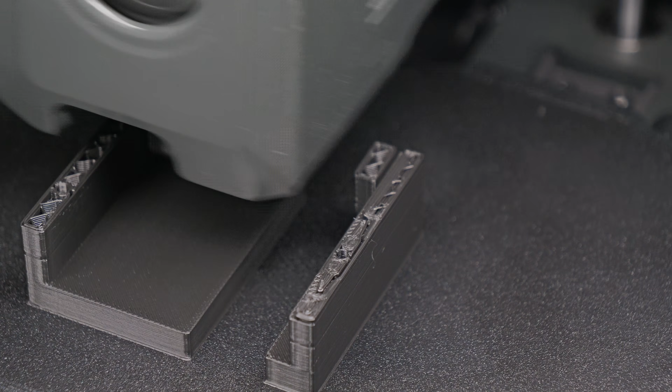For the last 2 months, I've been on a mission to improve my CAD skills, level up my projects, and unlock the true potential of my 3D printers. And let me tell you, I've learned a lot along the way, including about a dozen really valuable skills, shortcuts, and mindset adjustments that I'm really looking forward to sharing with all of you in this video.

See, like most of you, I knew how to design simple parts or even moderate assemblies, but there was still this huge gap between my ideas and my ability to execute on those ideas. And while I love that there are millions of incredible projects out there for me to download and print, at some point, I just got tired of hoping that someone else would solve my problems.

But throughout this entire challenge, there was one lingering question in the back of my mind. Could I really get to a point where I could design anything that I wanted to? Or would I always just be limited? There was really only one way to find out. Let's get after it.

The challenge started on day one, not by hopping into CAD or even with an online course, but actually by journaling. See, I used to teach learning and memory techniques, so I know all too well that one of the most important and overlooked steps in any learning journey is just to sit down and define what success actually looks like. What do you actually want to achieve in concrete terms?

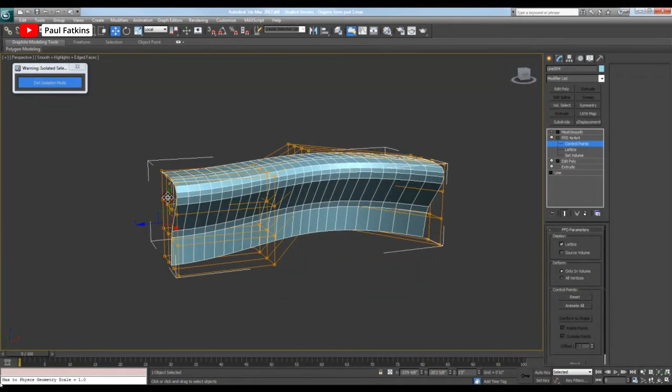So in the case of CAD, do you want to get better at organic modeling or parametric? Are you interested in modifying other people's designs, or creating simple one-part wonders, or designing complex mechanical assemblies? Coming into this, I thought that I was pretty proficient at designing parts. More on that in a few minutes. But I had no idea how to properly create more complex projects. So that was going to be my focus.

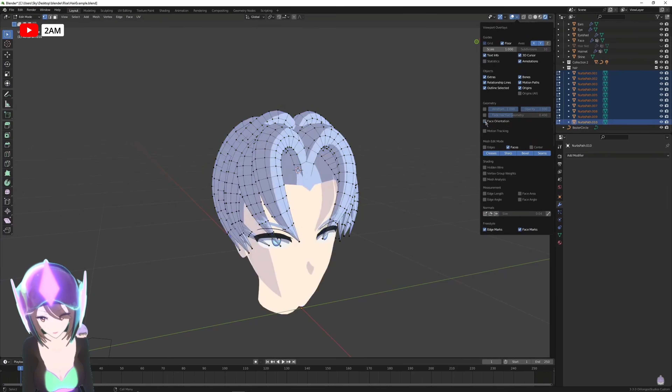Now that we know what we want to accomplish, the next important step is obviously going to be choosing a CAD package that supports that goal, not just the CAD package that everyone else seems to use. If, for example, you're really into mesh modeling or sculpting, you'll probably want to choose Blender or Shapr3D. If, on the other hand, you're into parametric modeling, then you're going to want to choose another option entirely.

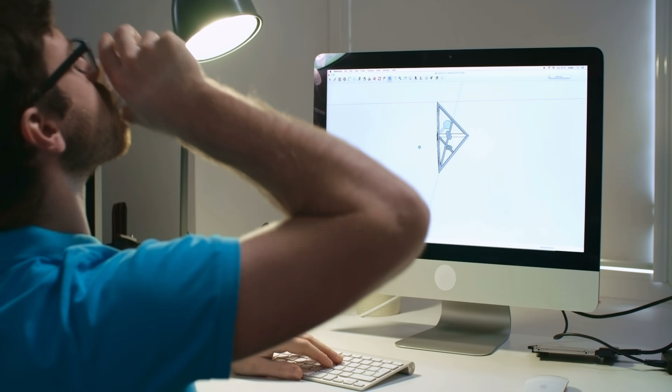Now, I know that many of you probably already have your CAD software of choice, so I won't harp on this point, but I will just say that if you don't absolutely love the CAD software that you're currently using, or you're finding a lot of friction when trying to do the things that you want to do, switch. I spent way too long trying to adapt Blender to meet my needs, and in the end, things really turned around for me when I found the right software for the type of design that I wanted to do.

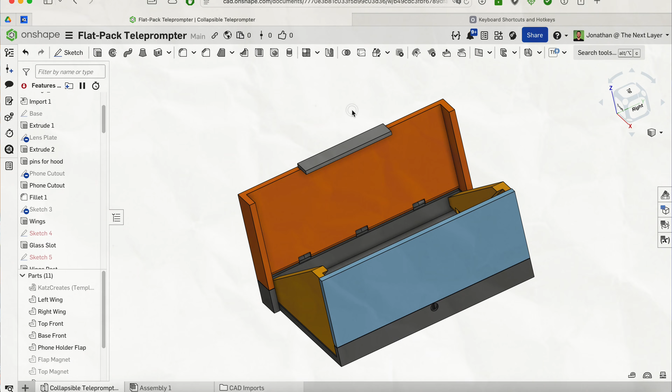The bottom line is the right CAD package depends on what you want to design, what type of computing device that you want to do it on, and how you think. So I just can't stress this point enough. Find a package that works for you.

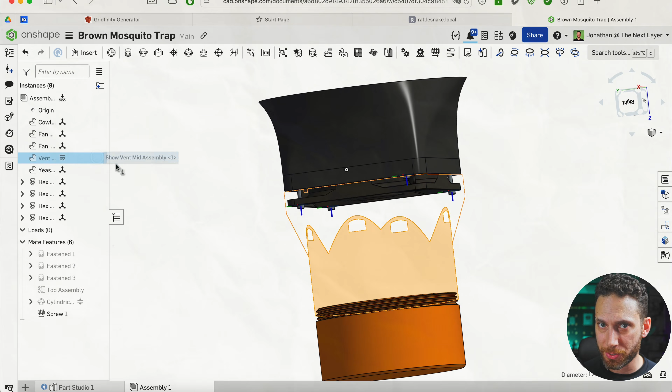Like I said before, and like many of you, my big goal with this challenge was just to become more proficient in designing more complex assemblies or projects that use lots of parts. So it should come as no surprise that that's exactly where I began my learning. Now, before, if I wanted to design a project, I would just jump in and begin designing each individual part in place until I was done. I thought that assemblies were only for when you needed to add hardware or create interactions between the different parts.

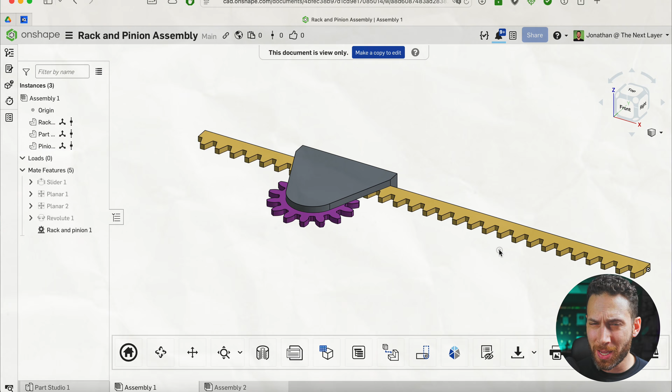But I was wrong. The problem with putting all of your eggs in one basket in this way is that your feature list gets really, really bloated. And even with the tricks that I'm going to teach you in just a second for organizing them, it's still a lot to scroll through. So as I watched different training videos and recommendations from CAD professionals, I came to realize that there's a much better way to do it.

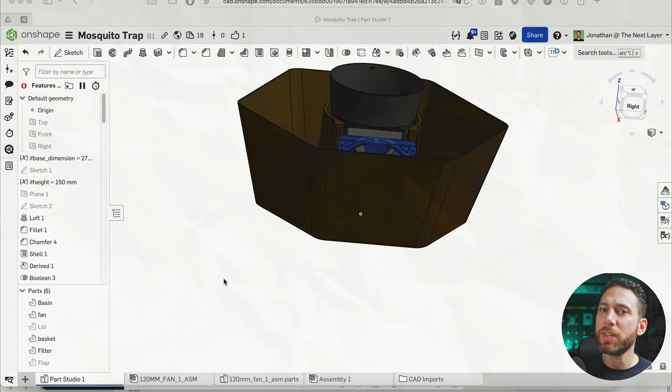Basically, if certain parts rely closely on the same geometry or use the same sketches or Boolean from one another, then it's fine to do it that way. Design them in one workspace.

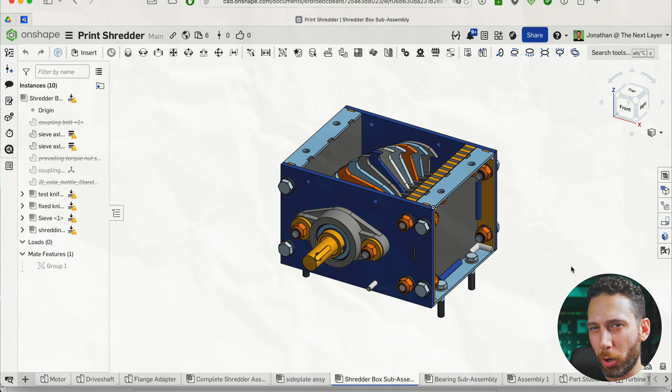But as soon as you start getting more complicated with parts that aren't geometrically related, you really want to start designing them in separate workspaces or part studios, then putting together the entire thing, hardware and all, in an assembly. If you need to reference another part for a part design, you still can by pulling in the part or assembly, Onshape calls this the derived feature, into the new workspace or part studio. Now I'm saying Part Studio because that's what it's called in Onshape, but the same principles and best practices apply to whatever CAD suite you're using.

Actually, hang on. Hey ChatGPT, can you do me a favor and translate what I just said into Fusion speak? Hey there, Fusion users. Think of this like using multiple bodies in a component versus a top-level assembly with joints.

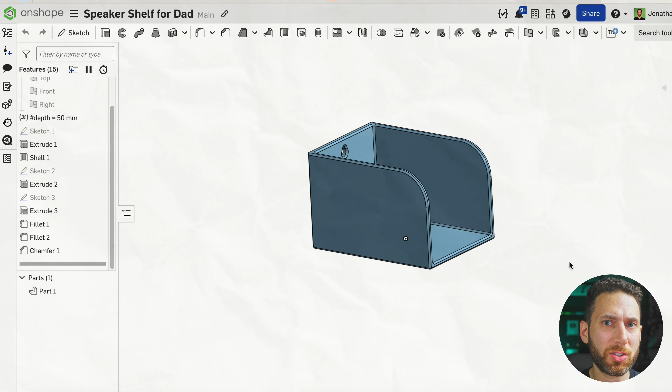Ugh, no offense, but even the terminology in Fusion really turns me off. Like, bodies? In any case, this one habit, alongside a few other tricks I'm going to share, will massively clean up your feature list, making it so much easier to go back and tweak or edit your designs, which saves you a ton of time. Now, I'll admit, I don't always take the time to do this, but when I do, it really lowers my sense of overwhelm and clutter. That's a good segue into the next two things that I learned.

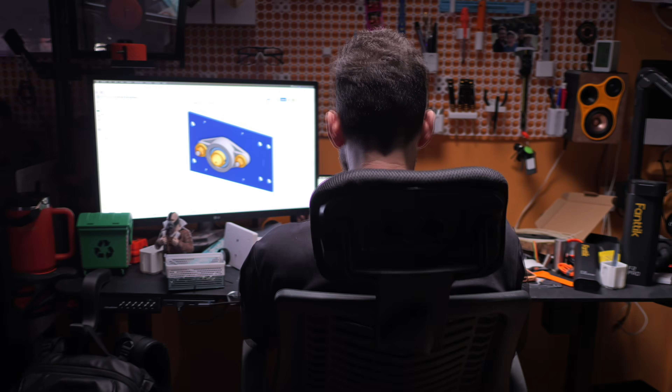Okay, so maybe this next one isn't as much of a tip as a mindset adjustment, but it was a big enough revelation that I had to share it with you guys. Going into this, I had a lot of feelings of embarrassment at how long it would take me to design seemingly simple assemblies, which discouraged me from trying to make progressively more complex things. But then, just by virtue of documenting this journey, I realized two things.

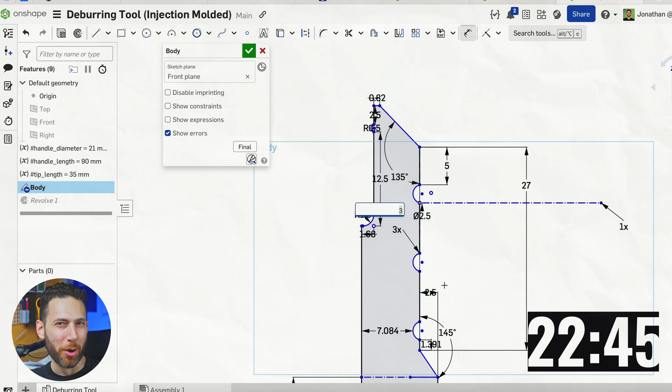First, when I looked at the time lapses I recorded for this video, my designs actually weren't taking nearly as long as I thought they were. It's just that when you're in the flow state, you actually lose track of time.

Second, because of that, I started asking other designers that I respect how long it took them to design their projects, and the answers, often weeks or months of full-time work, totally blew me away. This stuff takes a lot of time, but because it's not exactly entertaining to watch someone sitting at their desk in CAD for 4 hours, most YouTubers downplay or completely omit the amount of time it actually took to come up with their designs.

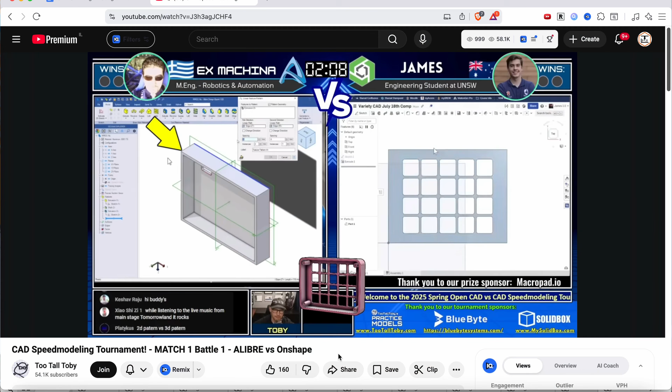And actually, when I watched some of the speed CAD tutorials on my friend Too Tall Toby's website, I sometimes found myself coming up with even faster or more efficient ways of doing things than even the absolute pros did. What I'm trying to say is, don't get caught up in thinking you're slow or inefficient like I did, because A, you don't have a good sense of time when you're really focused, and B, design work just takes longer than most portrayals online would lead you to believe.

With that said, once I got the big structural stuff handled, assemblies, design flow, mindset, the rest came down to efficiency, and I had a lot to learn on that front.

Probably the biggest takeaway from this entire journey was just how much you can compress the design process using simple shortcuts rather than mousing around your CAD workspace, and how that efficiency then has compound effects down the line.

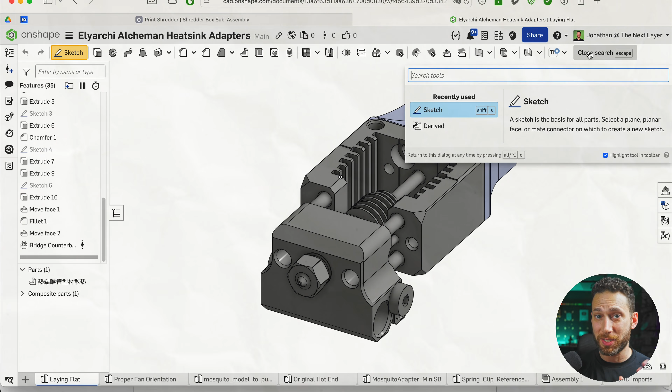For example, sure, a shortcut like the customizable S-Quick menu instead of searching for a specific function, or hitting the space key instead of deselecting things one at a time, those might only save you like 2 seconds each. But when you do each of those many thousands of times throughout a project, it quickly adds up to literal hours. And that's just the beginning.

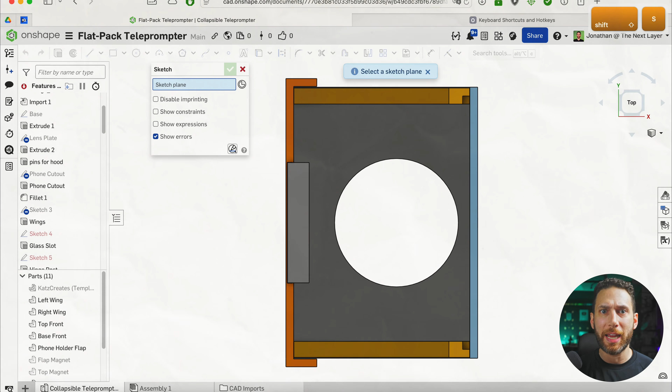How about memorizing the shortcuts to hide sketches, change views, create sketches, choose different tools, or select hidden objects rather than mousing around, hiding individual parts, selecting the part you want, then unhiding the parts. I'm not exaggerating when I say these tips alone can literally double your efficiency, shaving off hours while helping you maintain your focus.

But that's just the start of the compound effects, because when certain features become faster and easier to access, it actually becomes easier to abide by best practices. Take, for example, hitting Shift-N to rename a sketch or a part, as opposed to mousing over, double-clicking, and mousing up to click Edit. That saves a lot of friction, which makes it much more likely that you'll actually do it.

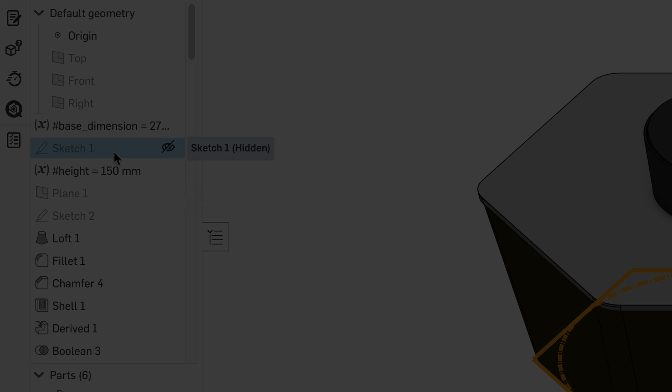And that has compound effects when you actually take the time to name everything. See, in most CAD suites, you can not only name parts, but also sketches, features, the works. And while this is an extra step, even with the keyboard shortcut, it more than makes up for it in time saved.

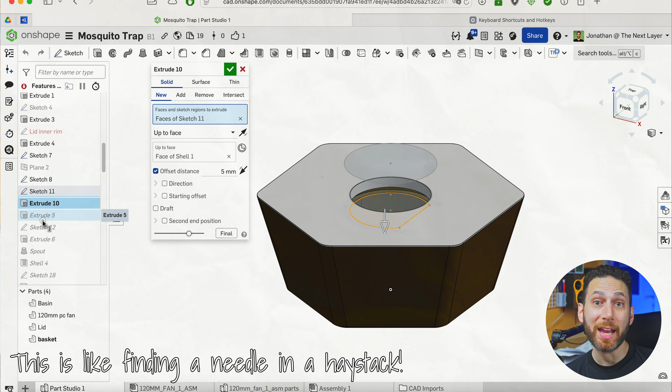How many times have you had to go back and modify something in your design after printing it, only to forget where exactly that feature was defined? And that problem doesn't get better with time if you're coming back to the project months later to improve your design. By naming everything, you save tons of time hunting around for the right sketch, extrude, or fillet. Plus, you make it much, much easier for others to remix or collaborate with you down the line.

But there is yet another, even more efficient way to modify your designs, and that's variables, or parameters for you Fusion folks. Sure, if your sketches and features are properly named, it's pretty quick to get into any parametric modeling software and change certain parameters. But if you still have to mouse around, go into the sketch, find the right parameters, double click, and all that different stuff, it's a lot of friction.

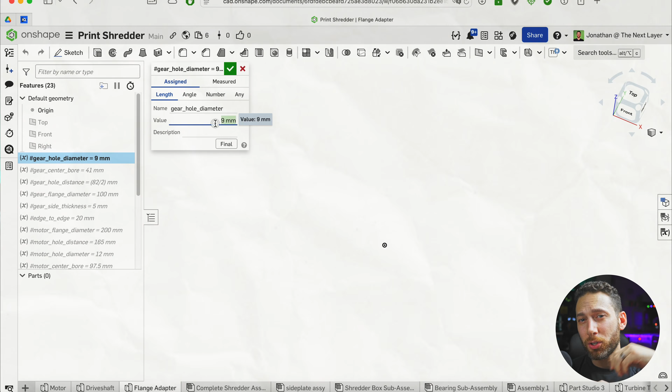If, however, you use variables, you don't even need to go into those sketches. And if you reuse the same variables over and over, for example in a shared variables studio throughout the project, you can fix entire projects with just a few keystrokes.

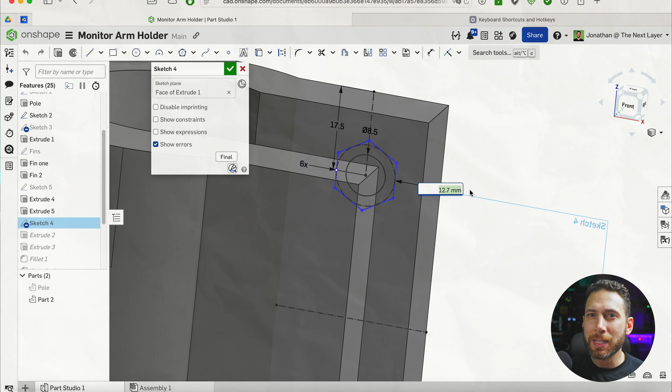Not sure how precise someone's printer will be? Declare a variable for clearances. Need to make different versions of your designs for use with different hardware? Declare variables. Unsure just how big you want something to come out? You get the idea. Variables make it quick and easy to modify entire projects, so long as you plan ahead in your sketches and design accordingly.

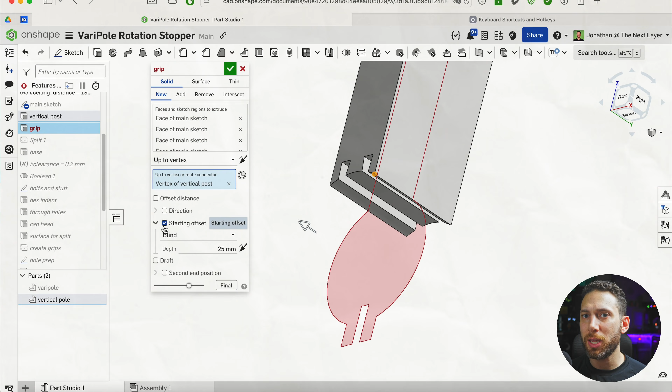You do need to make sure that you're doing things like extruding to specific faces or vertices rather than blind, for example, or you will end up breaking things down the line. So as you design, it's a really good idea to fiddle with your variables just to make sure that your design doesn't break when those variables are actually manipulated.

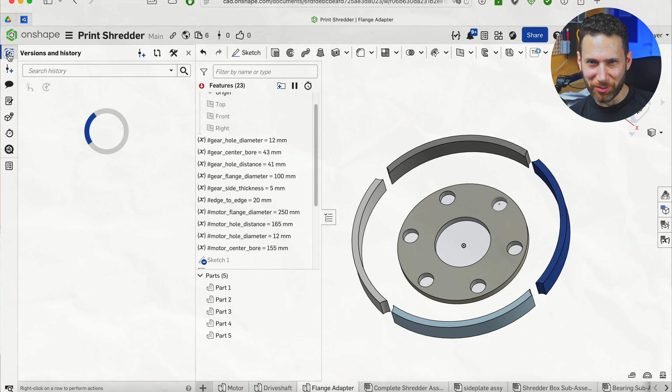But in case you do break things when fiddling around with your designs, and you probably will, now is a good time to remind you of another one of those best practices, and that's versioning and branches.

Personally, for example, I knew that I could create different versions of my designs or branch them off into different designs with a common ancestor, but I actually had no idea that I could go back in time and retroactively declare different places as versions if I forgot to do it.

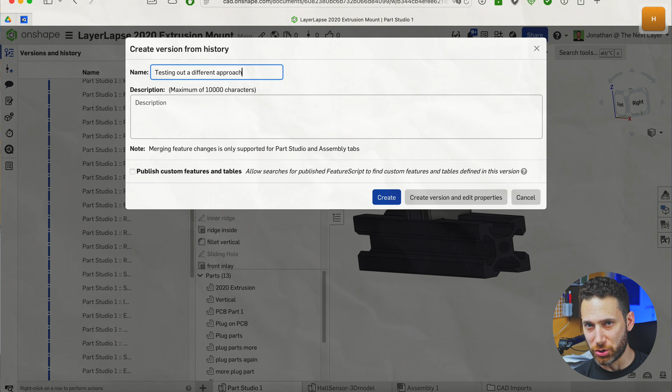Creating versions, like the last few tips, is a best practice for a reason. If you ever screw things up, it gives you a quick point to restore back to without having to waste minutes or hours trying to figure out where everything went wrong. What's more, it's another one of those things that makes it much easier to collaborate with other designers, whether in a professional environment or just when you share your designs with other members of the 3D printing community.

With the last few tips, your timeline will hopefully be much cleaner and more intelligible than ever before. But still, there's something to be said for having fewer features, both for efficiency and legibility. That's why this next tip has been so transformative for me.

Basically, invest some time learning about the lesser known, or what I'll call as-you-go features of your CAD suite. I'll explain what I mean in a second, but I don't want to make this video specific to any one CAD suite. I do, however, need to give examples, so forgive me if this one is a little Onshape specific.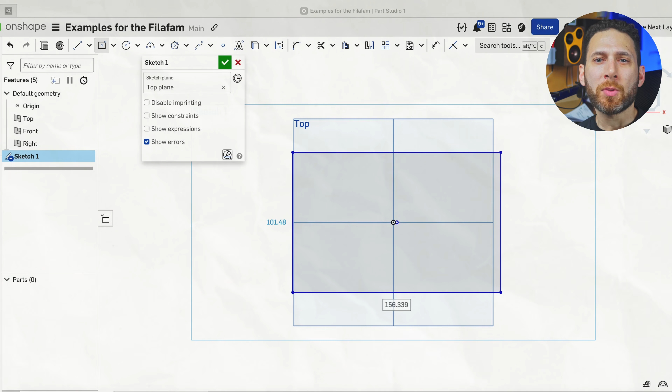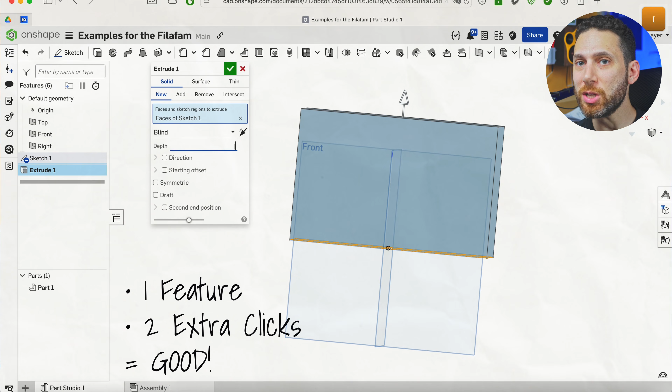One example would be the ability in Onshape to draft and extrude right as you go. Rather than using the draft feature after the fact, which means additional clicks and another feature clogging up your timeline, many times you can just draft right from within the extrude dialog.

Another similar example would be the offset feature right within the Boolean command, which, by the way, you can double up with tip number 7 to really maximize efficiency and declare all those different clearances as one variable.

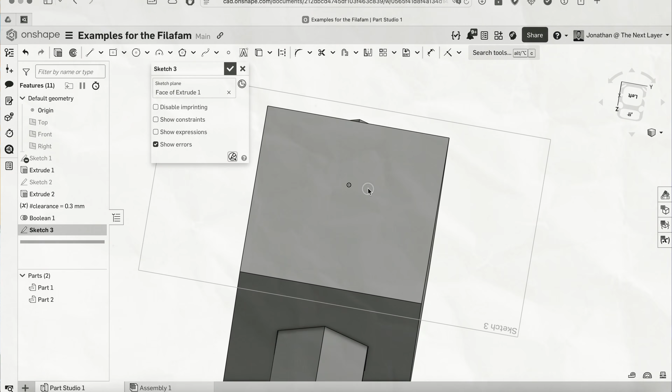But there are lots of additional examples. I, for example, used to always manually draw or offset lines whenever I needed a slot, until I realized there was actually a slot feature right within Onshape. I used to always create an offset plane if I needed to split an object, till I realized that you can actually use any face to split another object.

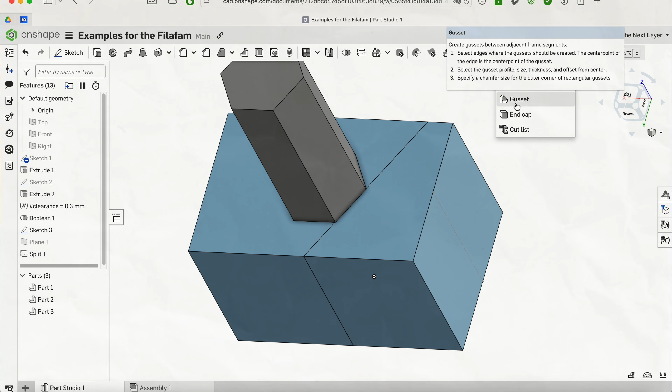And the list goes on and on, and it will vary from software to software, so my recommendation would be to spend some time studying these features. You could go through the menu bar on your CAD suite of choice and Google search any features you don't already understand, or check out tutorials and videos online from folks like Too Tall Toby to see which features others are using in their design process and how.

I've actually spent a lot of time doing this recently, and I'm constantly learning or remembering different lesser known features as a result, and those are making me so much more efficient.

And that's probably a good time to mention another lesson, which is that in most modern CAD suites, there are actually many ways to do the same thing. As I mentioned, some ways, like so-called as-you-go features or dedicated features for things like the hole function in Onshape, are going to be faster and more efficient, and it's definitely worth learning those faster features.

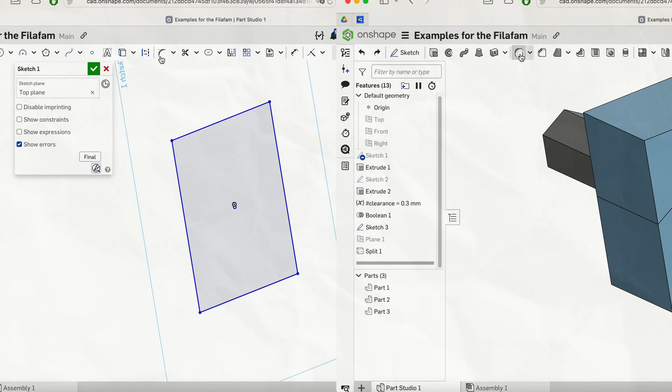But other times, there may be multiple perfectly good ways of doing something. Say, the difference between sketch fillets and part fillets, or creating patterns within your sketch versus patterning a feature after the extrude. Heck, sometimes there are entirely different methods or workflows to go about creating the same geometry.

I say this because for all my talk about the merits of investing in efficiency, at the end of the day, as my dad always loved to say, the fastest way is the way I know best.

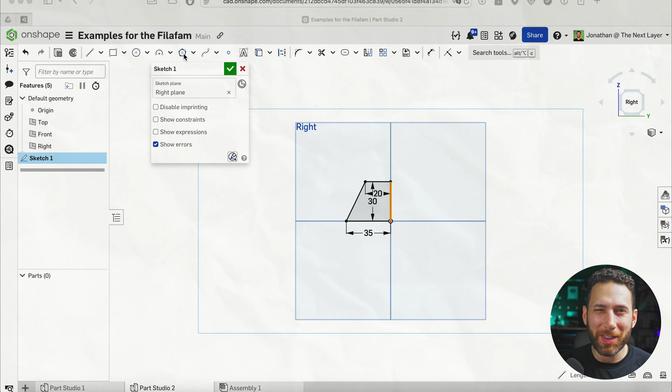I mean, sure, it might be more efficient to model something with a revolve, but if you're more comfortable or efficient with a series of lofts, for example, then there's nothing wrong with doing things the way that you prefer. So don't waste time beating yourself up about not doing things the ultimate perfect way.

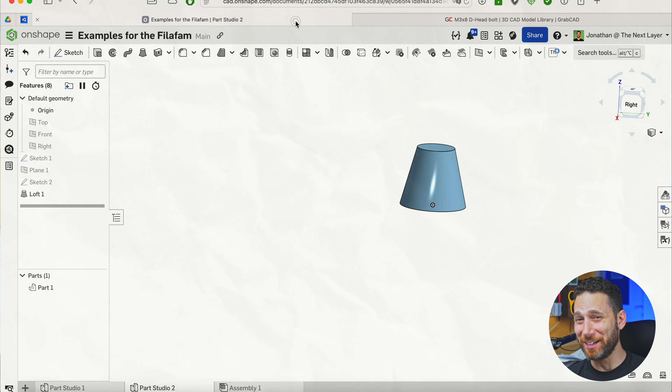Another way you can really improve your efficiency, especially with more complex assemblies, is by using parts libraries. I'm a bit embarrassed to admit this, but I actually used to think that if I wanted to use, say, an M3x8 bolt in my design, I first had to download it from a site like GrabCAD and then import it into the project for use in an assembly.

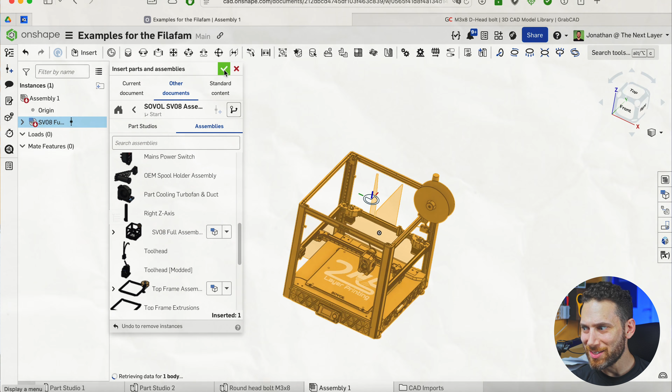Yeah, I know. It was only by watching tutorials on Onshape's website that I realized most professional CAD suites actually already have an entire library of all the standard hardware you would ever want to use. Not only that, but in Onshape, you can even import components or entire assemblies from any of the bajillion other public designs that other people have already uploaded and published.

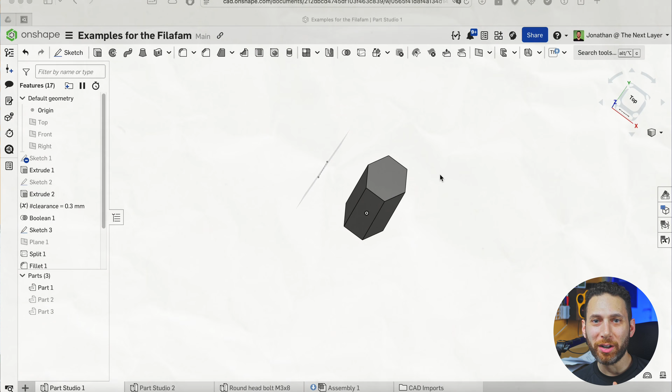But it gets better because in many of these CAD suites, you can actually create your own libraries of parts so that you have everything you frequently use at your fingertips. Say, for example, you are a multi-board addict like me. You can create your own library of common hardware, allowing you to instantly import those pieces into your assemblies or future designs and right away integrate them into your parts.

Just a side note though, you should only ever do this for private personal use. If you are uploading other people's designs, you might technically be violating the license of someone else's designs by distributing their work if you make it public. In any case, this saves so much time, and I cannot believe I didn't know that this was a thing.

But what about libraries of parts that are just too extensive, too varied, or too customized to be listed comprehensively? For example, there are a million different configurations for Gridfinity bins and bases, and nobody is going to upload a library all the way up to M85 bolts or threads. So for that, we have FeatureScripts, or add-ins as they're called in other CAD suites.

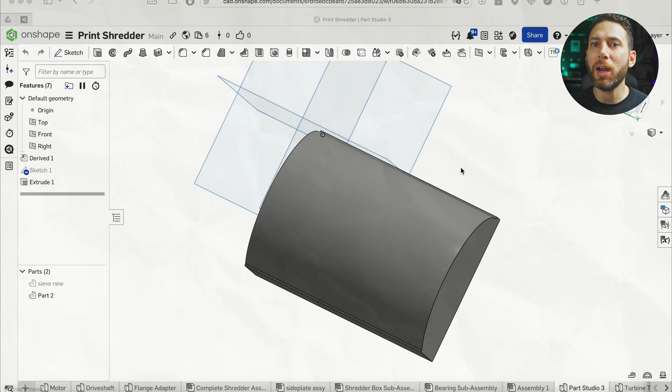FeatureScripts are basically apps or plugins that other developers have made to extend the functionality of your CAD package. In Onshape, for example, you have FeatureScripts for texturing an object, inserting custom Gridfinity bins into your projects, creating custom threads, and a whole lot more. But there are similar add-ins for other CAD software as well.

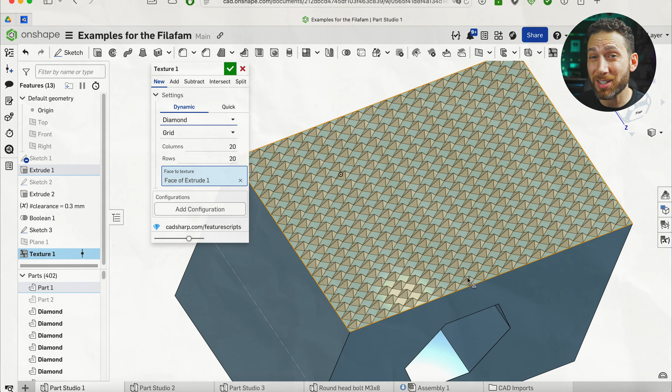Leveraging these plugins saves you a ton of time because it allows you to quickly insert functionality into your projects that could take hours if you had to manually design it, all with just a few clicks. And it can really level up your designs as well. So whatever your CAD package of choice is, I highly recommend searching around and installing some of the most popular add-ons and spending some time figuring out how to properly use them.

Now, another mindset thing I've had to really make an effort to change has been around prototypes. In most other maker endeavors, whether building a 3D printer or a custom wooden workbench, you generally do everything in your power to get it right the first time. Measure twice, cut once, you know? So when it came to design, I found I was actually holding myself to an impossibly high standard.

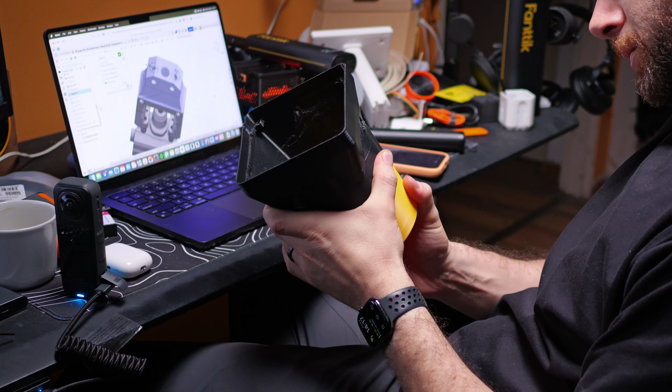I was beating myself up when my first prototype didn't fit properly. But the truth is, no matter how good you get at simulating your project using assemblies, there are always going to be unknowns when designing something new. It could be clearances or tolerances that need adjustment. It could be mechanisms that just don't work the way you envisioned, or something not feeling right in the real world when you hold it in your hand.

And here's the thing, if you expect yourself to get it right the first time, you'll always have a negative association with designing new stuff. At least that's where I was.

So instead, I'm trying to teach myself to take an approach more in line with how software startups work, to embrace failure, but to fail faster and learn as much as I can in the process. After all, we learn more from mistakes than from success, and most mistakes in life cost a whole lot more than a few bucks worth of wasted filament.

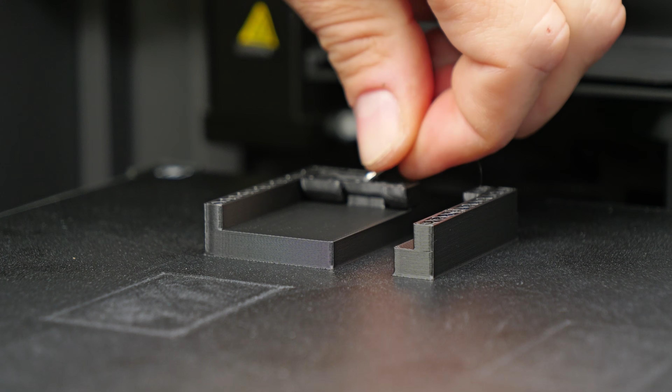So now, when I design something, I do a few things differently. First, if it's something big, I see if I can isolate the unknown parts like hinges or mechanisms and test print just those pieces. Your slicer's cut function is actually really great for doing that.

Second, instead of reprinting prototypes that don't fit, I physically cut or shave, melt, or glue, and otherwise massage them into a new prototype to see what will work before updating my design and printing it again. This way, I can effectively cut in half the amount of wasted time and material I use in my design process, and that reduces that guilt just a little bit.

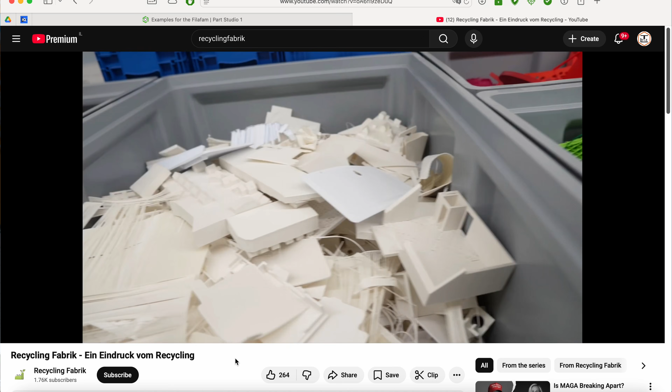Third, I try to remind myself that prototyping is a natural and expected part of the design process. Companies like Recycling Fabrik have built an entire business out of recycling prototype 3D prints from Germany's largest and most respected manufacturers. So if the pros at companies like Bosch, Siemens, and BMW need to print out a few prototypes before they get it right, then you better believe amateurs like myself do as well.

Which brings me back to the question I asked at the beginning of this video. After 60 days of immersing myself in all things CAD, where do I stand? How much better did I actually get? And have I overcome some of the limitations and hurdles that were holding me back?

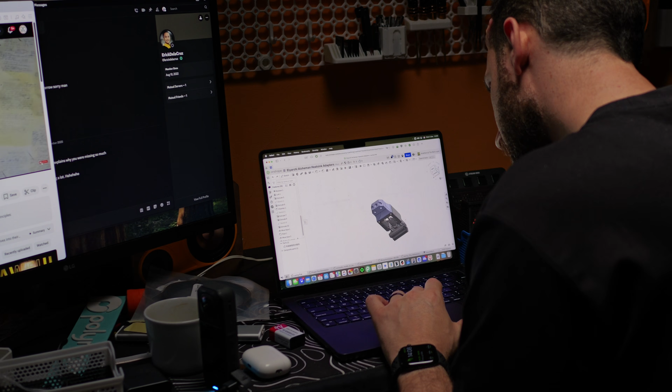Well, as of right now, I'm probably not going to get any job offers from SpaceX anytime soon. But I do think I've turned a corner. At the end of the day, it all comes down to confidence. If I've learned anything, it's that complex designs take a lot of time and a lot of work. But before this challenge, I didn't have the confidence to even bite off those bigger projects.

So I didn't. But over time, both through creating progressively more complex designs myself and by observing others, I've really come to realize that the only things separating me from them are experience and the confidence to actually sit down, put in the hours, and gain that experience.

No, 60 days didn't turn me into a trained engineer. I still don't know the design principles behind why you use a specific kind of bearing or a certain size gear or anything like that. But for the first time ever, I'm confident that if I just keep going, keep designing new things, keep learning new techniques, eventually I'll get there. And I bet you will too.